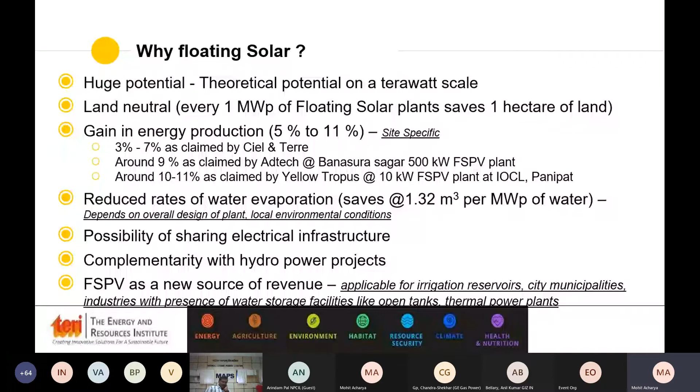Globally, the technology has reached a level of around 2 gigawatts of installation. Out of this 2 gigawatts, majorly almost 94 to 95% has been installed in Asia, led by China, followed by Japan, South Korea, and Taiwan.

The interesting point to note is that earlier, when the technology was getting recognized in countries like Japan and China, the project capacity was in the range of less than 2 megawatts to 5 megawatts. But now larger projects have started coming up, and this reference has been there in India as well.

These are the few companies who provide services like project development, anchoring and mooring supplies, or floating structures for this technology. The major components of this technology, different from ground mounted or typical rooftop PV plants, are the addition of floating structures and anchoring and mooring. Apart from that, the PV modules, inverters, SCADA system, and transformer are all there in the typical solar power plant.

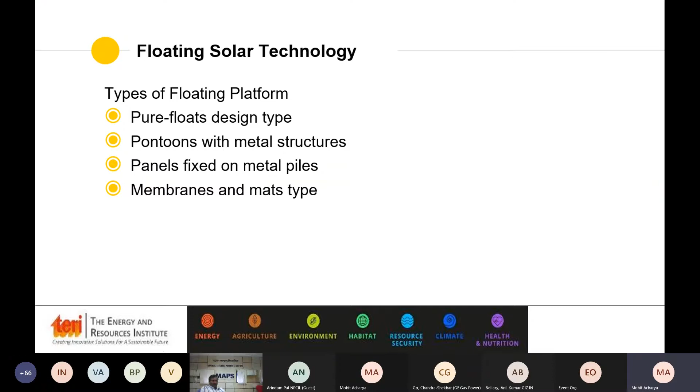To give an idea about the type of floating platforms being used in most projects right now, it can be categorized into four types. The pure float design, which is famously or majorly used in projects right now, utilizes especially designed buoyant bodies which support the PV modules. You can see this type of technology in almost every project coming up right now.

There are different technology providers or suppliers for this: Hydrelio, designed by Ciel & Terre; one more Japanese company who supplies; Sungrow; and one more Indian player, Yellow Tropus, who previously supplied this kind of floaters.

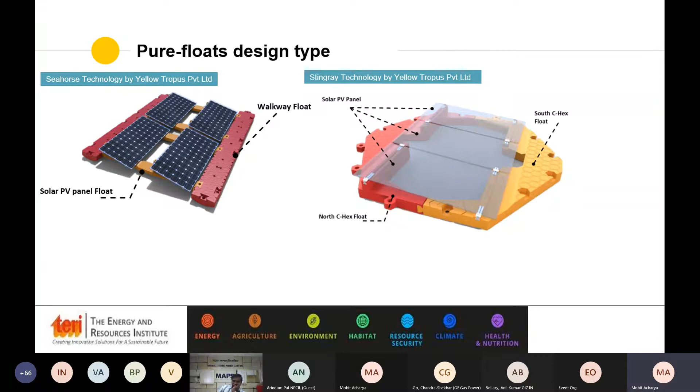Moving into the second type, the floating panels or solar modules are mounted using metal structures and pontoons. This kind of supporting structure came up in the earlier days of this technology and has been used in some projects in Japan as well as Netherlands and so on. The solar modules are mounted with the help of metal structure on pontoons, which provide the buoyancy.

The third type, I could not refer to as floating, because in this case the entire floating solar panel setup, in addition to other components, is fixed to metal piles. This type provides a good opportunity to co-locate floating solar panels generating clean energy while co-locating with fish farms and other uses of that water body. There are a few projects installed in China. The picture you can see is of a 100 megawatt project at a fish farm in China.

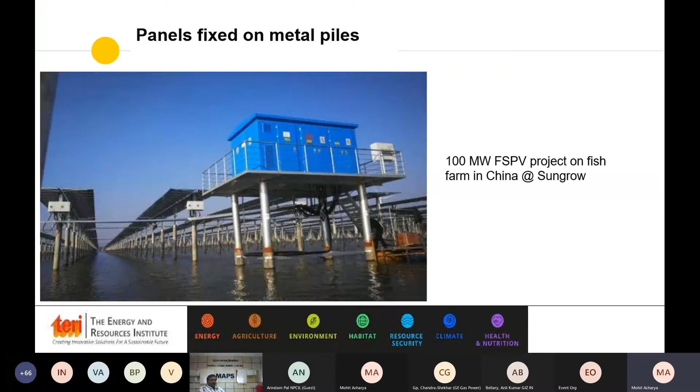The last part is basically membrane type or mat type, in which a platform is created by covering the entire water surface with the help of rubber mats. This type of membrane technology is particularly suitable where the water body has a lesser area, and also in cases like industrial ponds, where you can cover the entire water body area.

Now, since floating solar technology has been installed on the water surface, it is important to understand what role the water body has been playing, and what type of water body or purpose that particular water body serves. It has been divided into further categories.

The first one, which is generally considered low-hanging fruit, is static kind of water body. These are particularly water storage reservoirs used in industrial or process requirements, or in mining ponds or water treatment ponds. Since the surface area of the water body is not very high, there is minimum effect of waves and current, and one can cover almost 80% of the water surface area with floating panels. Also, as the area is less, anchoring and mooring is relatively easy.

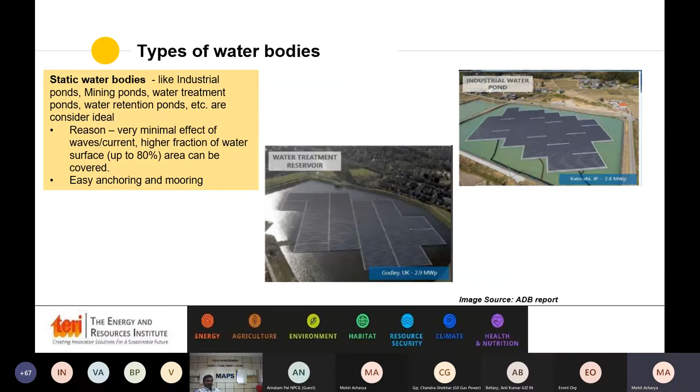The other type is large water bodies, examples being hydroelectric dams or irrigation reservoirs, in which the risk is moderate. This is because the area of the water body is generally high, and because of wind, wave and current effect, there could be a cyclic fatigue load at the floating panels. Also, there are chances of water level and water depth variation. One has to look at the distance from the shore, and do a thorough study of bathymetry and subsoil investigation.

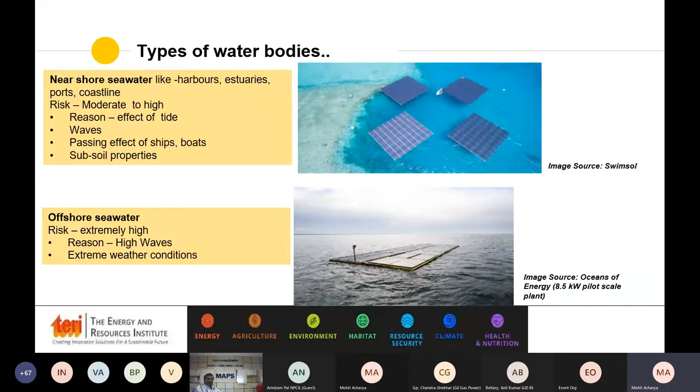The other type is near-shore seawater cases, particularly near harbors or lagoons near coastlines. Here the risk is moderate to high, mainly because of wind and the effect of tides and waves, and if the lagoons are near ship movement, one has to consider the passing effect of ships and boats as well.

The last one is offshore, which looks at installing this type of technology in seawater. Till now, only very few projects have reached the concept-to-commission stage, with around 50 kilowatt to 100 kilowatt installed in a few parts of the globe. Research studies are currently underway on how the longevity of this technology can be increased, particularly in these extreme environments.

You can see a few of the projects installed across various countries, like 150 megawatt in China, which is the largest plant installed in the entire world, at around 150 megawatt.

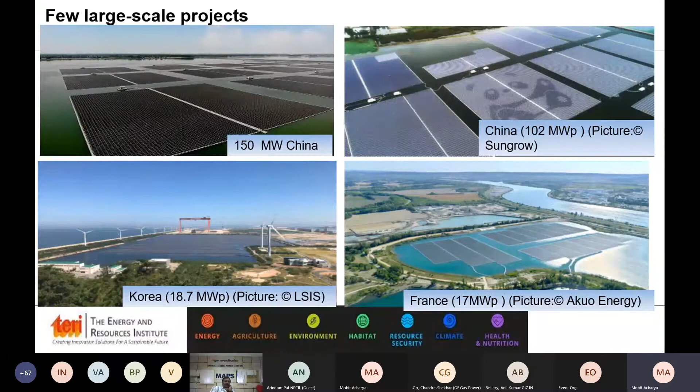Coming back to the cost side, as we have seen in the case of ground-mounted or rooftop systems, the cost of floating solar technology is also being reduced as the technology matures. The interesting point to note here is that India has already been discovering lower rates, lower costs, as compared to other countries.

Recently, in the Andaman and Nicobar, India's first floating solar plus storage project has come up, and the tariff or levelized cost of that particular project was in the range of 7 to 8 rupees, if I remember correctly.

Now, with the support from Energy Transition Commissions India, TERI has undertaken a study in which we have looked at state-wise potential of solar technology.

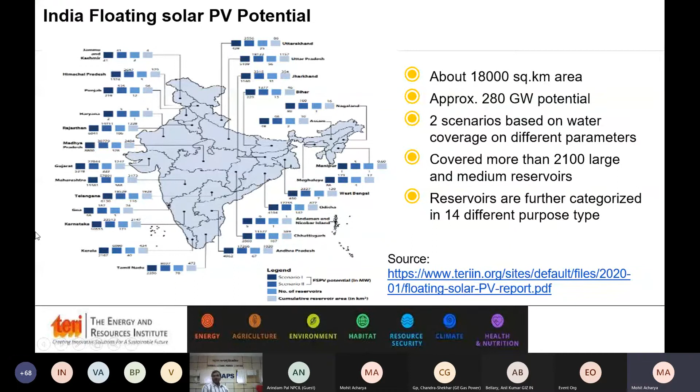The cumulative surface area of reservoirs we identified is around 18,000 square kilometers. You can see the state-wise potential, led by Maharashtra, Karnataka, Madhya Pradesh, Gujarat, and Rajasthan.

Further, each reservoir has been estimated under two different scenarios, and each reservoir has been categorized based on their purpose type.

In this slide, you can see that each of the 2,000 water bodies identified has been categorized based on purpose type, and based on that we've given some threshold or range for how much water surface area can be covered, and based on that we've come up with the potential numbers.

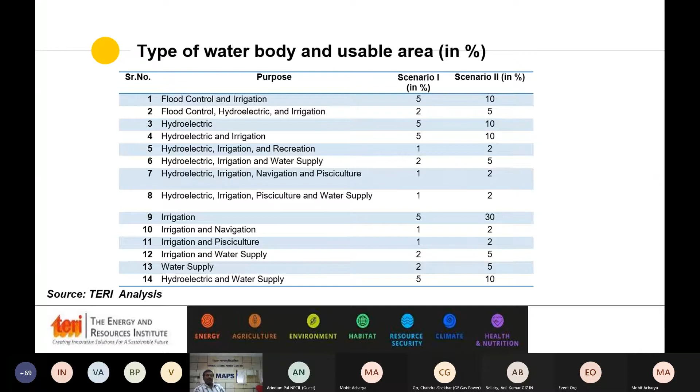The basic approach, I won't go into much detail, because this particular approach has been well explained in the report released earlier this year, and I request all of you to please go through that report to see what approach we used and what actual project design steps one has to take.

Now coming to the project design guidelines, as compared to ground-mounted projects, I would say the feasibility stage or due diligence step is the most important one.

The reason is that there is very limited know-how of this particular technology available, and floating solar projects are more site dependent as compared to ground mounted or rooftop systems. So one needs to do a thorough study of how the water surface area has been changing historically.

One needs to study how the water depth has been changing, how the waves and current profile of a larger reservoir behaves, what the wind conditions are, and what the bottom topography of that patch of reservoir is. So one needs to do a thorough study.

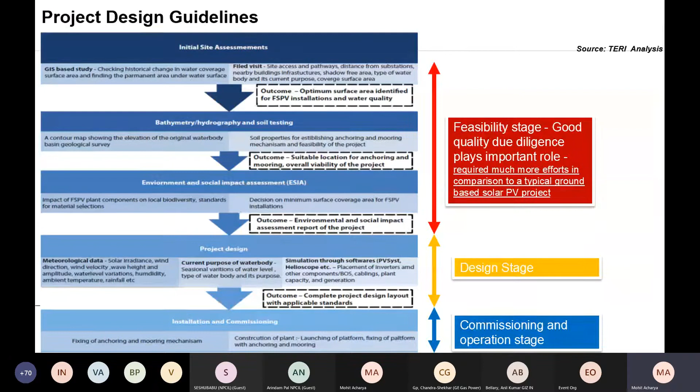Let me give an example of how a GIS-based study works before jumping into deciding that X megawatt of capacity can be installed. I've taken an example of the Parambikulam reservoir.

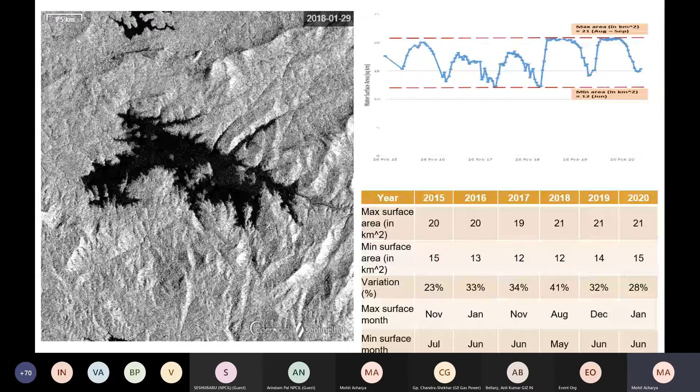So ultimately, from the GIS study, you need to find out an optimal water surface area. If the water reservoir is very large, then that patch should not be too far from the shore, otherwise it will increase the cabling cost and other component costs. It won't be too near to the shoreline either, otherwise there might be chances of drying up in the lean season. So these kinds of steps are much needed to undertake this particular type of technology.

Now, suppose I take an example: you have a reservoir of around 100 square kilometers. Out of that, through GIS based study, you have identified 5 or 10 patches in the reservoir surface where water coverage is almost there entirely in 10 to 15 years, and water depth is also in the range of 10 to 15 meters.

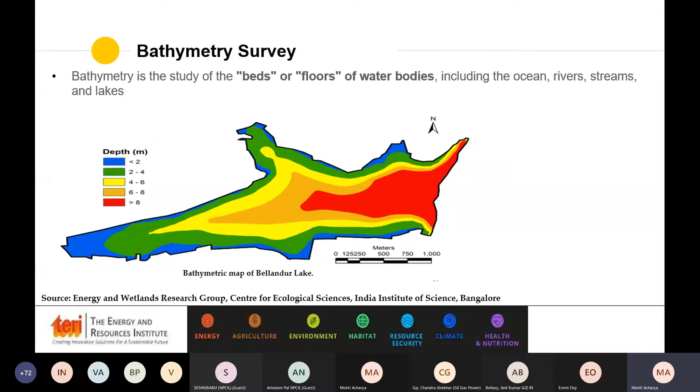Once you have that data with you, you can use bathymetry study to find out the exact topography of the bottom surface beneath the water surface. Bathymetry has been done with two types of technology: one is single beam and the other is multi beam. Each has its own associated costs.

So over here you can also devise a methodology where, out of the 5 or 6 patches you have identified, you can conduct a bathymetry study first with a single beam, because it costs less. Once you have a better understanding of the exact profile of bottom topography there, you can select 2 or 3 patches out of those 5 or 6, maybe around 10 square kilometers out of 100. On that selected area you can conduct a multi-beam echo sounder survey, which can provide much better resolution, and which can be used at a later stage for designing your anchoring and mooring points and so on.

Just to give you an example of how a bad or improper bathymetry survey could leave you - in case the background research has not been done properly, it can puncture the floating panels at the time the reservoir gets drying up. So one has to do a thorough analysis for this kind of technology.

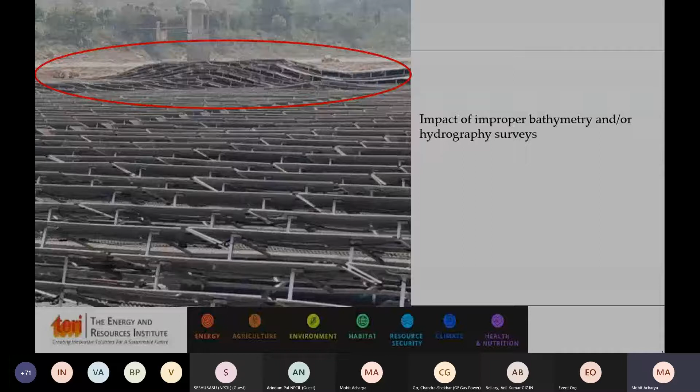The other important part that has been emphasized by Mr. Mishra in his presentation is the plot size. We have to understand that the initial design phases of floating solar PV projects are a bit different compared to a ground mounted one. In a ground mounted project, each row acts as a single unit, so the force because of wind is lower compared to floating panels, because each point or joint is interconnected and acts as a single unit, a single plot. So the plot size plays a very important role here.

A larger plot size can lead to a high number of anchoring and mooring lines, and can cause problems at the time of a cyclone or typhoon event - even if one part gets damaged, it can reduce the entire project lifetime. So as per our analysis, we have found that a project plot size of around 3 to 5 megawatt peak in a single unit is the ideal suitable one, where the forces on the anchoring mooring lines also get minimized.

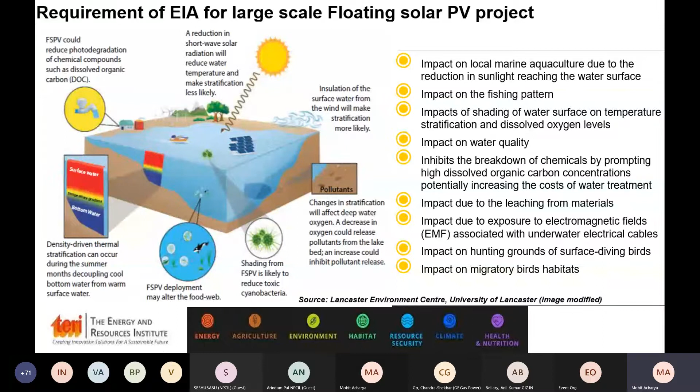Just summing up my presentation, as I explained earlier, each and every activity at the feasibility stage can be a major cost driver or can hamper the overall life cycle of a floating solar project. If one has not done the background research correctly, the entire cost of that particular project can be very high, and we as a technology provider have to consider this fact.

So it requires conducting a thorough bathymetry and bottom topography study. We also have to consider the surface soil conditions, water depth and variation, distance from the shore, water quality particularly salinity levels, and wind speed at that particular site. Each of these points has its own significance and has to be checked thoroughly.

The important point to be considered is that floating PV technology is more location dependent and requires rigorous due diligence compared to ground mounted or other RE technologies. Since it is still early days for this technology, I would request not to compare it with ground mounted costs or other renewable energy technologies, because there is a learning period in understanding this technology. At this point of time, no one knows what its effect could be over 20 or 25 years of its life. So this kind of point has to be considered.

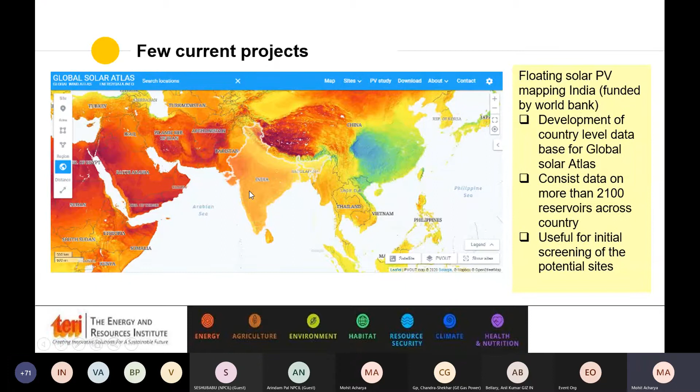So with this, I stop my presentation here. If anyone has any doubts or questions, I'm happy to answer at this point of time, or I can revert back if you have more questions.

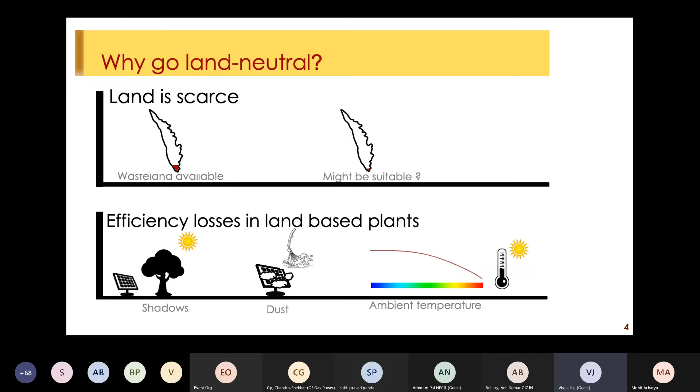More than that, it can be very well integrated into the ecosystem. In fact, if designed well, it does not need to isolate water-based livelihood activities such as fishing, but can be very well integrated along with that. In fact, in the Mekong Valley, there is an experiment going on where floating solar is being combined with fish hatcheries, so you can get the best of both worlds.

I'm sure there are a lot of cases that will come up in India as well, where floating solar should be and can be combined with water-based livelihoods. The other part is that there is a definite concern that Mohit has emphasized, that because of coverage of a water body, there can be problems with the level of sunlight penetration or the level of dissolved oxygen. But these are things that can be designed for.

For example, in order to enhance the dissolved oxygen levels, the floating solar power plants can be combined with large aerators. So with aeration, you can improve the oxygen levels in the water body that can go and feed into the plants and the flora and fauna.

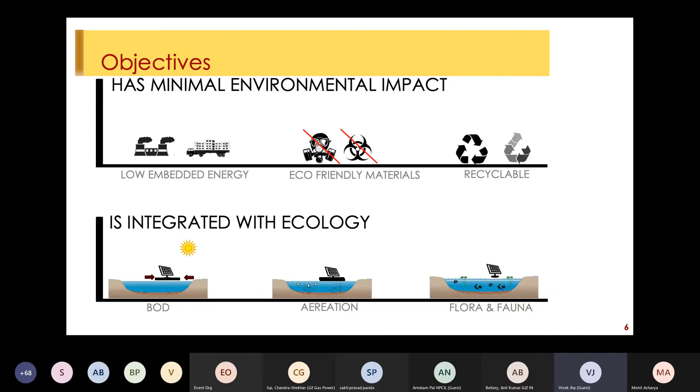Also with respect to sunlight penetration, the tenders as of today in India say that maximum coverage from the structure within the area you cover for a floating solar power plant should be 70%, and 30% of the area should be left free so sunlight can penetrate. And with the use of glass to glass modules and other things, one can look at that as well. It has socio-cultural benefits.

In fact, very recently, we are in talks with inland waterways where floating solar can double up in the form of jetties and provide charging stations for running electric boats. So that, to my mind, is another great business case for floating solar, because as of today, a very limited portion of our freight movement happens through inland waterways. And if we are able to create an infrastructure of charging, then we can create electric-based mobility on inland waterways with the help of floating solar as well.

I'll get into the cost bit in the next few slides. So where all can it be done? It can be done essentially wherever there is a water body. But if we target the most fertile areas first, then large dams, village ponds, lakes in urban local bodies, and reservoirs within industrial complexes.

Within large dams, we have seen NTPC take the leadership, where NTPC has converted a lot of these thermal power plant reservoirs and thermal power plants as sites for floating solar. This is a very stark difference between the presentation I gave last year and this year, because now we are seeing the completion of almost close to 300 to 400 megawatts of plants from NTPC. And that will be a big win for the industry, because there'll be a lot of learnings that will come up along with such large projects.

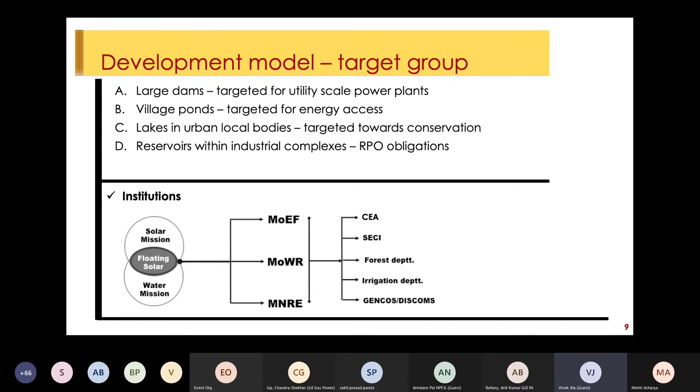And of course, village ponds, we can look at multiple business cases where we can support our agricultural and farmer background with power from floating solar. Under NREGA, about 1 lakh ponds have been created in India. Each of them are about 3 to 5 acres, which can deploy about 500 kilowatt to 1 megawatt of floating solar power plants. This will not only help in a reduction of evaporation losses from the ponds, but would also provide additional energy for a variety of needs that can be considered.

As the report that TERI has done, floating solar as a third pillar, does a very detailed calculation of what is the market available. And also in the last presentation, Mohit stressed the importance of the surface coverage of a reservoir. So depending on how robust the ecology is, the surface coverage changes. If it is a raw water reservoir in an industrial complex, we can go up to about 80% coverage, because it has no ecosystem attached to it. But if we are looking at a lake, then 5%, 6%, or 10% is the maximum one should go.

These are, after we have identified, and most of you are from the tendering authority side, it's important to know where do we choose our sites. These are a few pointers, mostly self-explanatory, but you can see them on the slide.

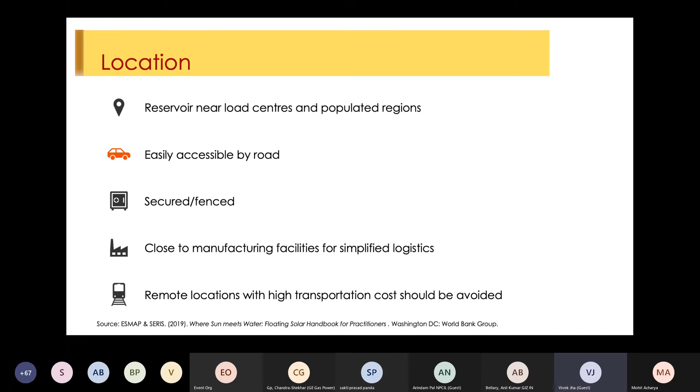It's important to note that security is an important function. Secondly, it should be close to manufacturing facilities, so it should not be a remote location—getting there itself is going to be a huge challenge. And if it is closer to load centers and populations, then the energy can be utilized by those load centers, so one gets a better business case.

In terms of weather and climate, areas should be chosen which have calm water, preferably, with little winds or storms if possible. And if it's a reservoir which gets affected by drought, then this becomes an even more feasible solution.

The shape of the water body, in terms of water body characteristics, should be regular. It should not be an extremely irregular shape. And if possible, the south side of the reservoir should be wider, so that you can maximize the potential of deploying a floating solar power plant.

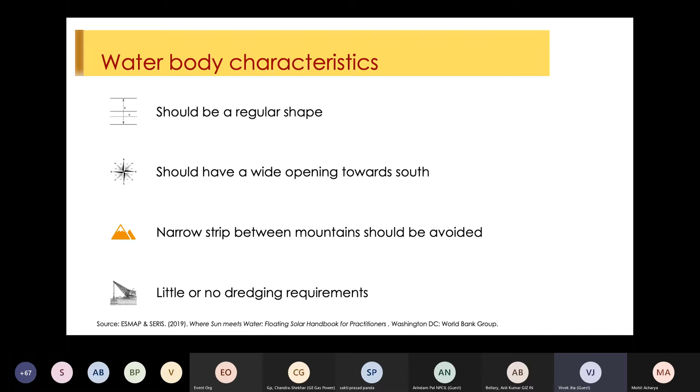One should avoid areas where there is high terrain on either end, because that will give shadow losses. This is the case in our hilly regions where there are reservoirs, but one has to undertake analysis to determine how much shading loss can come because of the high terrain that exists.

If possible, reservoirs should have shallow depth—by shallow depth, I mean 10 or 20 meters at the max. We shouldn't attempt, or we can attempt, reservoirs which are 90 or 100 meters deep, but that will make the anchoring and mooring solutions extremely expensive, and the viability of the project itself might get questioned.

More so, the areas that we choose should have decent soil bearing capacity, so that anchoring and mooring can be planned well. And the reservoir bed, as far as possible, should be clear of obstructions.

For example, the Tehri Dam had submerged the old town of Tehri. Now if we want to do a floating solar power plant at Tehri Dam, first, the depth of Tehri Dam is almost about 100 meters—that has to be taken into account. Secondly, because the town was submerged, there would be a whole lot of obstructions on the reservoir bed, so one will have to keep that in mind.

So low salinity water bodies would be preferred, and it should not be very far away from electric infrastructure, which in case of floating solar is an added advantage as compared to a ground mounted system.

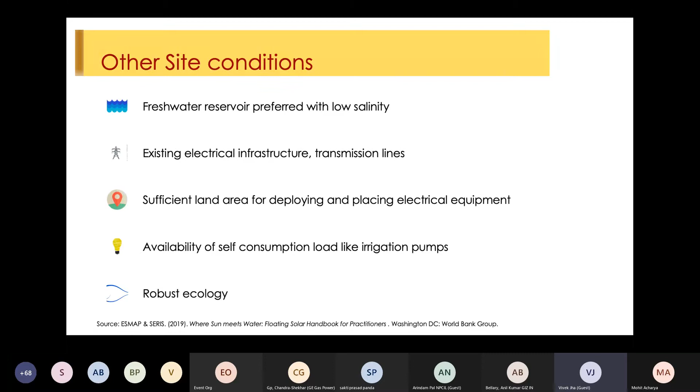Very importantly, there should be sufficient area available close to the shore where all your electrical equipment can be deployed. You'll have the floating solar power plant in the reservoir, but extra electrical equipment such as transformers or inverters would need to come on shore. So sufficient area should be available so that all of these equipments can be placed, and a regular evacuation system can be created.

Now, what is a floating solar power plant? There are multiple dimensions to it, starting with what material we use—should we use thermoplastic, ferrocement, or FRP? So a whole lot of questions and ideas or concepts drive what kind of floating solar plants we need to build for the future.

Later in the day, you'll be visiting a ferrocement plant. It has its own advantages, as it's extremely stable and can withstand heavy storms and floods, but it is also extremely expensive and not scalable. In case of thermoplastic, it has its own drawbacks, where I'm sure other people have spoken about it—the joints crack under multiple cyclic loads, and thereby they are not the best fit.

But whatever be the case, there is a lot of design work that needs to go into the sector. As more and more projects come up and competition intensifies within the sector, there will be more design ideas that come through. As of today, thermoplastic or HDPE is probably the most used material and has a decent amount of buoyancy. There are multiple tests done on the material, which are part of the tender specification, so that makes it to an extent safe, but things like joints and other aspects have to be looked at once again.

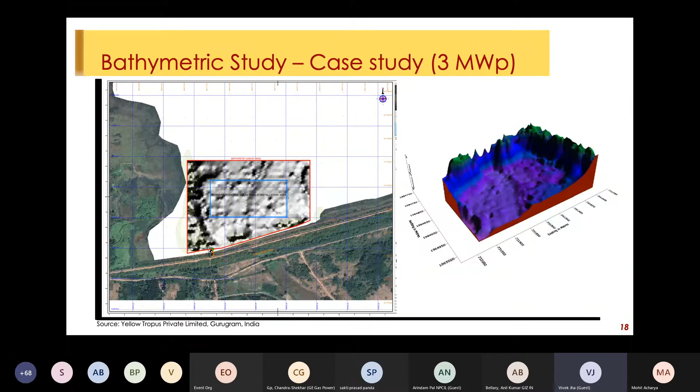So once the bathymetry is done, this is what the bathymetry map in terms of contours looks like, and this is what a bathymetry survey area looks like as a 3D representation on the left and right. Also very much required is something called a standard penetration test, which is done in case of ground mounted plants anyway.

But here, the standard penetration test is done to identify the soil bearing capacity of the reservoir bed. Because if I have to deploy an anchor which has to take a load of about 10 metric tons or 15 metric tons, I better be sure that if I put a helical pile, the soil will not give away, or else all the efforts made into the project will go as a failure. So soil studies and geotechnical studies, including standard penetration tests, become very important.

These are important to choose what kind of anchoring mechanism one deploys in the floating solar power plant. Here you see different types. The first two are what we call precursive earth-driven anchors or helical piles, and the rightmost is a gravity anchor or dead weight anchor.

Depending on the loading on a power plant, one can decide whether to use a gravity-based system or a pile. Let's say if my loading comes to about 10 metric tons, and if I decide to go with gravity anchors, the density of concrete used is about 2,500 kg per meter cube. As soon as it goes in water, the apparent weight of that anchor becomes half. So if it's a 2-ton anchor in water, it'll have a holding capacity of only 1 ton, because a lot of it will be lost to buoyancy.

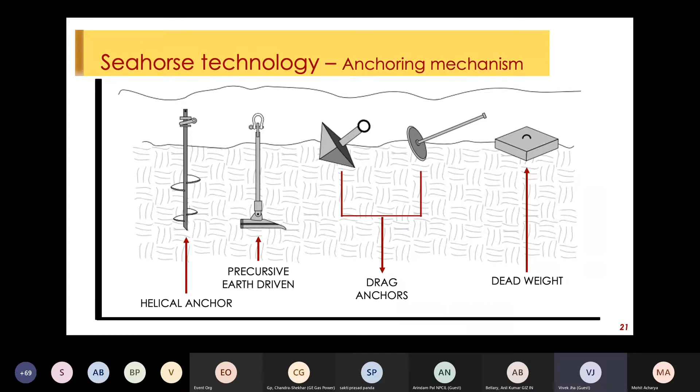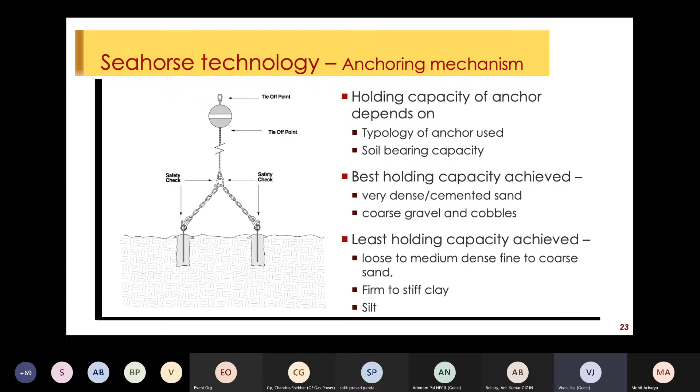So depending on the soil capacity, you decide which type of anchor you use and what will be the design of the anchor. It is not one size fits all. Every site has different requirements, and that will have to be calculated through geotechnical evaluations.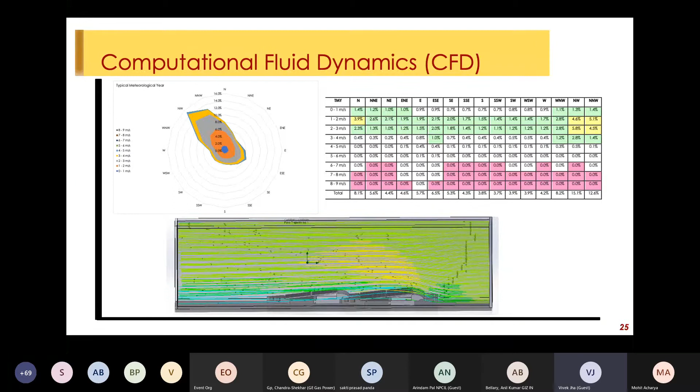What other studies are essential need to be conducted from a design perspective, and this is typically what the developer or the EPC would do. You'll have to consider computational fluid dynamics to see what wind loads are coming onto the floating solar power plant, from which direction, and how much.

Then finally, you come up to the final design of the anchoring and mooring. Also, while designing the anchoring and mooring system, you have to take into account two things. One is the water level variation, because in most of our reservoirs, during shallow periods the water levels will be low, and during the monsoon season the water level will be high. So you have to account for this variation. Also, one has to keep in mind that your solar plant always needs to be south facing.

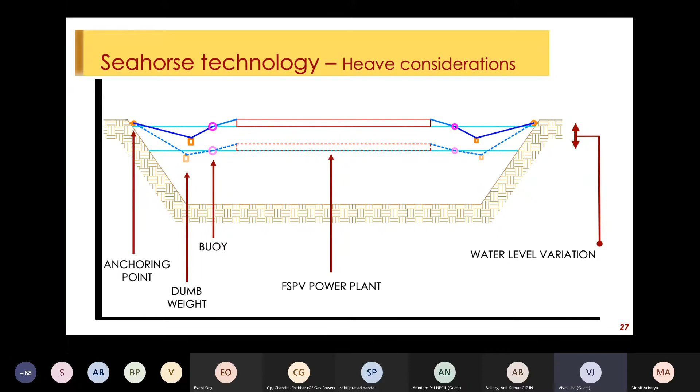As I said in an earlier slide, once these studies are done, you also have to parallelly locate an area where assembly and storage of your floating power plant can happen. A floating solar power plant essentially gets constructed on the ground, then pushed into the water. So for on-ground assembly, you need an area—approximately 2.5 to 3 square meters per kilowatt peak is required per megawatt of inventory you want to keep. Also a clear area of almost 200 meters by 20 meters is required for the assembly.

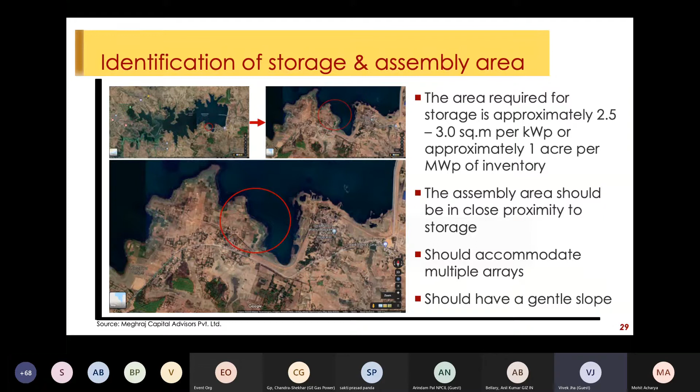Now we come to the risks. Anilji, how much time do I have? Okay, never mind, according to my watch I have another about 5 minutes, so I'll try and hurry this up.

Moving forward, there are multiple risks that are appreciable in a floating solar power plant. One is value chain risk, because as Mohit and other speakers said, this is not an established industry. From design of floats to actual deployment, there are multiple gaps in the value chain that exist today, so one has to take that into account while planning a project. Please don't give very short timelines, and take contingencies into account, because as the industry is not very established, some processes may create a bottleneck and take extra time.

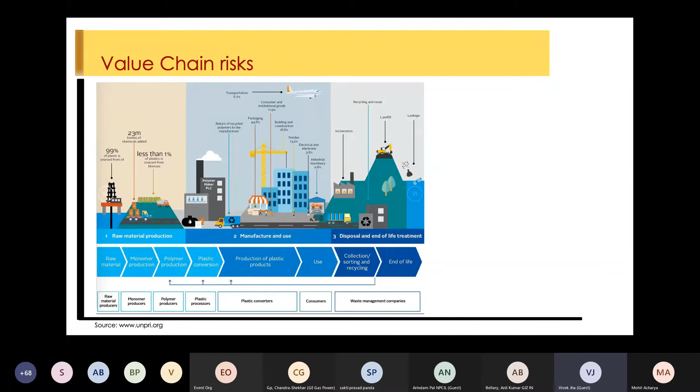Also there is a problem with multiple contractors available. As somebody asked, for hydrography you have a different contractor, for bathymetric survey you would have a different contractor, then for deployment on land you'd have a different contractor, and for deployment in sea or in water you'll have a different contractor. So there are multiple contractors that exist today, and there is not one agency or contractor that will give you a turnkey solution. So it's important to make sure the process you follow while designing and executing the project is flawless, where multiple contractors can come and talk with each other and help in the design procedure.

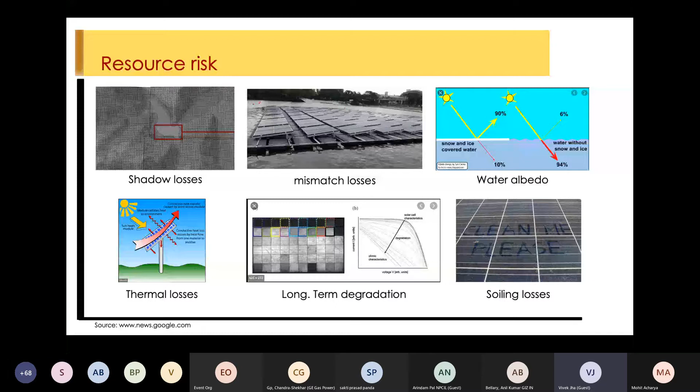There are policy risks, as many of us are aware - Andhra Pradesh was one example last year. There are resource risks, which are pretty self-explanatory. The first one shows what I was talking about, high terrain, and then there are mismatch losses because of waves and other factors. There can be other factors to consider, like soiling losses or long-term degradation, some of which are general to ground-mounted solar as well as floating solar.

There are regulatory or compliance risks. I remember the government, a couple of years back, Maharashtra was planning a large floating solar power plant, but the moment this power plant was announced, there was a lot of protest from the farmers. So an environmental and social impact assessment, though it might not be necessary as a regulatory procedure, it's extremely important that you undertake it as a tendering authority, developer or EPC, because you don't want to be 3 or 4 months into the project and suddenly a risk shows itself, or people start protesting. All the communities and associated stakeholders need to be taken along while designing the project, otherwise one will have problems deploying and maintaining the project.

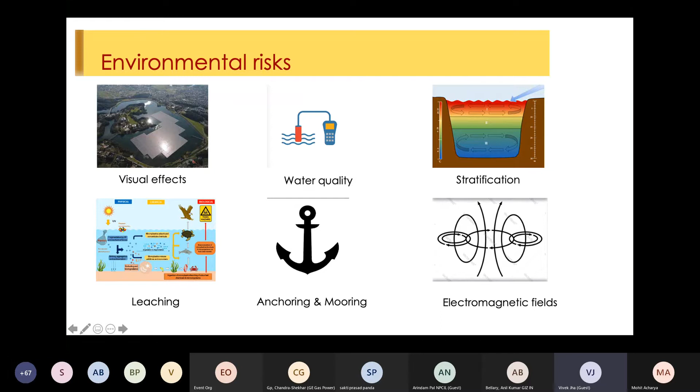There are definite environmental risks, most of which have been explained earlier. Another thing we don't often look at, shown on the top left, is the visual effect of a floating solar power plant. If you're locating it close to an airport, it should not be very large, because you'll get a glare from the floating solar power plant which might affect incoming flights. Also, there are risks because of electromagnetic fields associated with floating solar power plants, which need to be taken into account.

In summary, what I've tried to do is give you a whole lot of risks which are associated. There are a few risks I haven't talked about due to paucity of time, but there are technology risks which some of you asked about - what kind of float should we take, what kind of anchoring mechanism should we deploy?

Construction risks - who is the contractor doing the project? Are they an established contractor with the right track record? What are the operation and maintenance risks? How often do I need to look at the anchoring and mooring system, once in 5 years or once every year? And what if there is a sudden storm - how will I maintain the plant?

Finally, something not talked about in policy circles is the decommissioning risk. We are putting up a lot of plastic in the water body, which is HDPE. What happens 25 years down the line? Who is going to recycle the entire plant? Is the plastic used in the floating solar power plant being recycled by the developer, the component manufacturer, or the tendering authority? So these are some questions and risks associated which one has to see.

Finally, I'll leave you with a bit of good news. We did a plant at IOCL, which was in an industrial water body, and we compared the electricity generation to a rooftop plant in the vicinity of about 100 meters. Within a period of about 4 months, we saw a gain of 8.3%. This means that if you design your project well and the site conditions are right, you can get a definite gain from floating solar - meaning the cost of floating solar can be 8.3% higher than the cost of your rooftop system and still be viable.

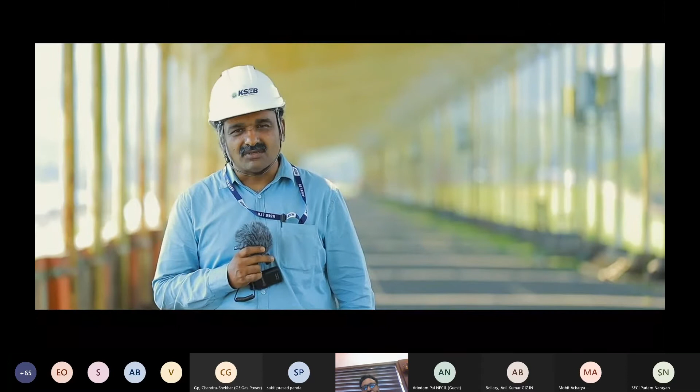Good afternoon. On behalf of Kerala State Electricity Board, I welcome you all to the virtual tour of Banasura Sagar floating power plant. Before I move to the plant, I request my colleague, Mr. Anil, who is looking after this dam, to give an introduction about this dam, and after that we will move to the actual location where we are all eagerly waiting.

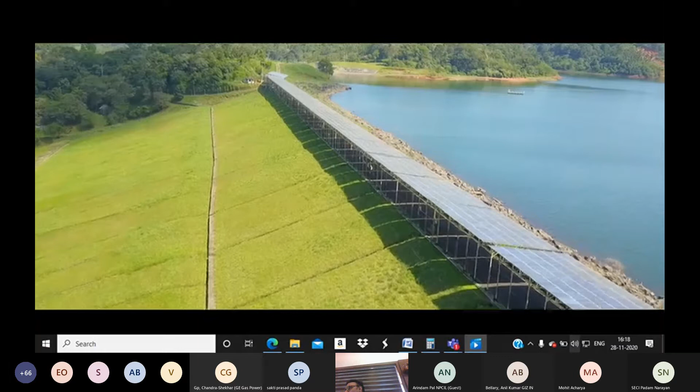Welcome to all. The floating solar power plant, 500 kW, was the largest one in India when commissioned in 2017. This plant is located in the Kutyadi Augmentation Reservoir, commonly known as Banasura Sagar Dam. Before moving to the plant, we'll discuss the common technical features of this dam and augmentation scheme. It is situated in Karamanathodu, the largest tributary of the Kabani River, which flows through Kerala, Karnataka and Tamil Nadu, then finally ends in the Bay of Bengal. This is the second largest monolithic earthen dam in Asia.

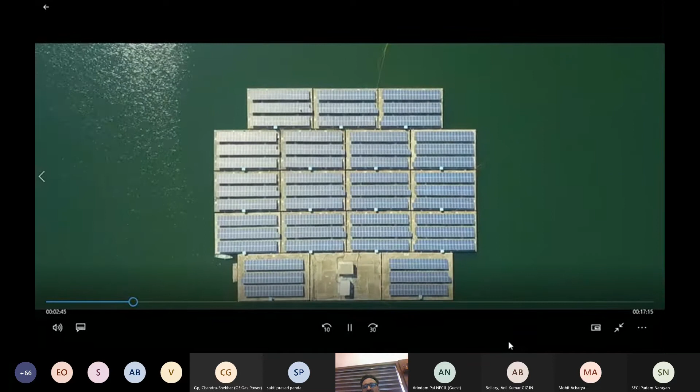Welcome you all to the 500 kilowatt Banasura Sagar floating power plant. I'll quickly move to the complete plant, where we are standing in front of the panels. Just to give you an idea, we have totally 17 floats, made up of ferrocement, on which our plants are located.

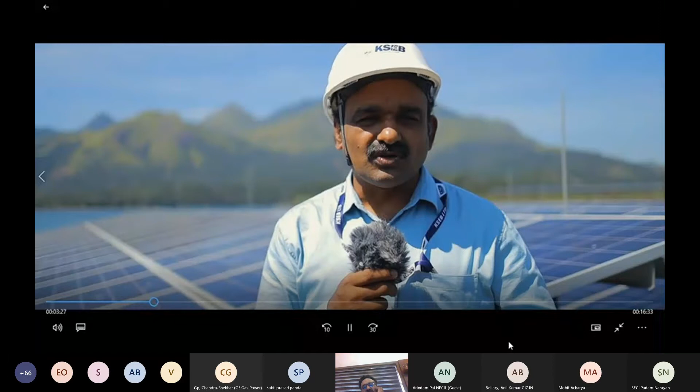Every plant has approximately 23 modules in series, forming one string, and we have 5 such strings connected to a string inverter. After that, from the string inverter it goes to the AC panel. From the AC panel we have another transformer, stepping up to the 11 kV level, and from the 11 kV level it goes to our grid. This is the basic idea of our plant.

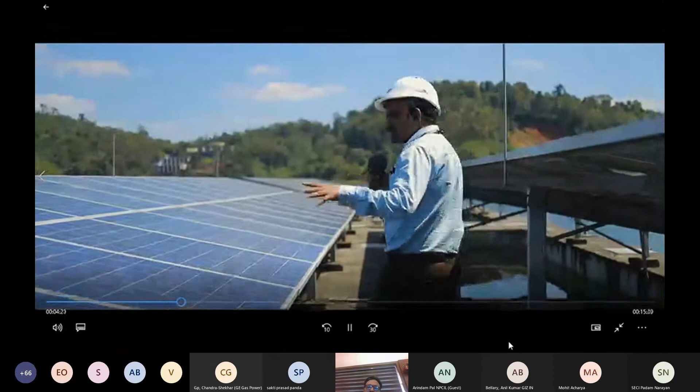We are now moving onto this floating panel. You can see this is actually our ferrocement float, and it is very stable compared to other HDPE floats. That is what we found. Just like we are moving on normal land, that is the advantage of this ferrocement, where we have no vibration at all. For the solar plant, if it is vibration-free, then we get the complete output. That is the advantage of this plant.

Also, what I wanted to show is this water. This plant is placed over the water body, so the cooling effect is direct and the plant gets cooled. This is one of the advantages of placing our panels as floating solar. This is the design we have: you can see this water, and above which our panels are placed, so that the temperature of the panels comes down.

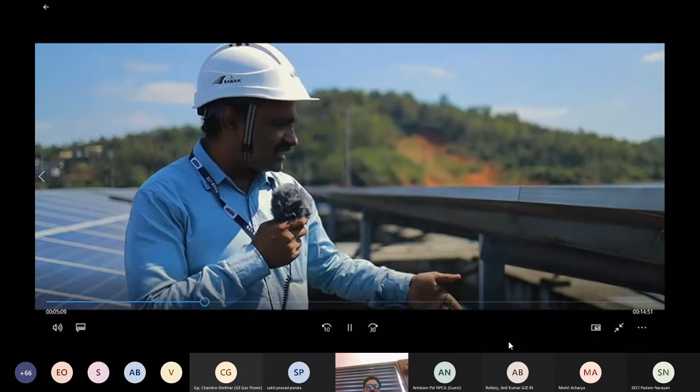So basically, we know that the output voltage, or output power, is inversely proportional to the temperature of the modules. Temperature is less when it is placed over the water. This is the design here. Let's move quickly to the next.

Inverters. I already told these are the modules, and we have 23 modules connected in series, and like that we have 5 strings. One string has got 23 modules, and then we have 5 similar strings, all connected to one string inverter of capacity 30 kilowatt.

Let's move to one inverter and we'll see the inverter. Then we'll move on to the control panel.

Yes, this is our earthing strip, and this earthing strip is actually in every float. It is surrounded in the water, and this earth we are taking directly and connecting to remote. We are not putting this down and earthing it here. We are taking this earth completely, and then earthing it at the remote shore. This is how earthing is done. I'll explain it when we reach the plant.

You can see the gap between these two floats.

As you all know, the solar plant is to be placed facing south, and this angle is approximately 15 degrees here. As per our design, it is approximately 15 degrees. This also you can see here. I think the structure also, you can see this structure. This is the structure part on which the panels are placed. And this is, as I have already told, over the water body, so that the panel is cooling down because of this water.

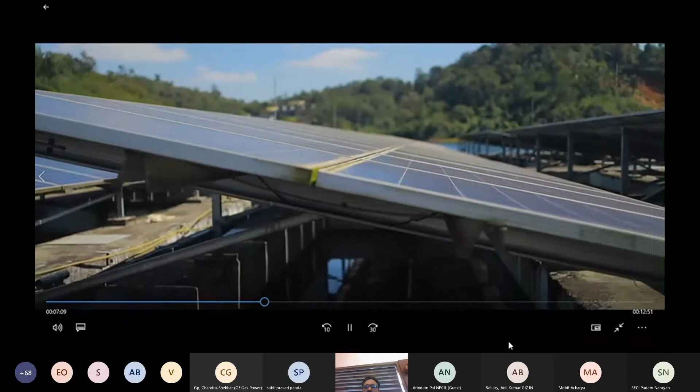One more thing I wanted to say. If we can place water - that is what literature says - if you can sprinkle water in one way or the other, then the temperature of this panel will go down, which will in fact improve the efficiency of the plant. This is what we are also planning on an experimental basis. We have to put some water continuously, or sprinkling, or whatever way we try, and we are planning to do that to increase the efficiency of the plant. The water will be coming throughout, so that temperature will come down. When temperature is less, then you can see that our efficiency will be going up.

This is our main central float. I have already told that we have 17 floats, and apart from the 17 separate floats, we have a single central float on which our control panel and SCADA system, as well as transformer, everything is placed. The peculiarity of this plant is that the DC to AC conversion is done in this plant itself, so that we are evacuating AC from here, not DC.

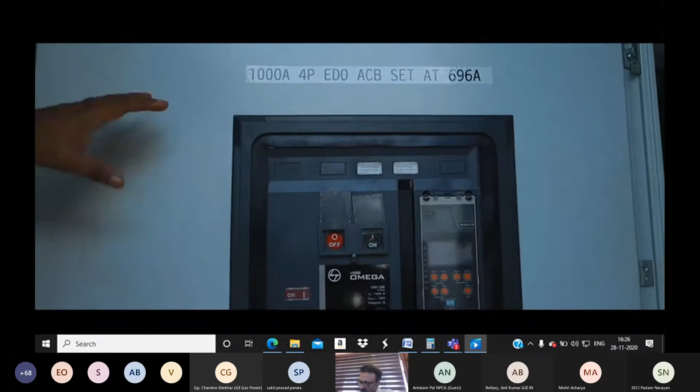These are the ones, and from here it comes to your circuit breaker, the LV circuit breaker. We have relays connected for the AC side, including overcurrent relays and earth fault relays. We also have voltmeters and ammeters which show the actual power.

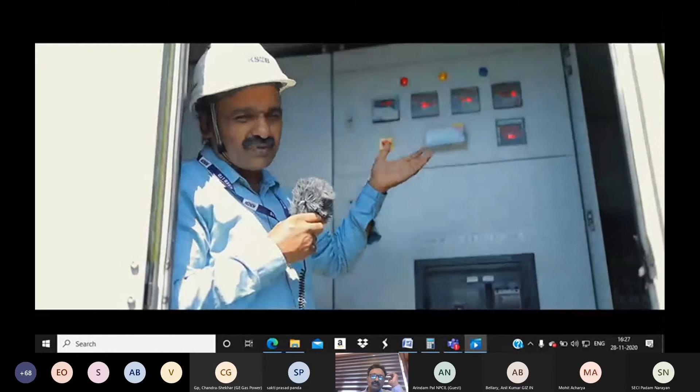Apart from this, we have SCADA which gives you accurate power details. Let us move to the HV side. As I mentioned, the peculiarity of this plant is that the conversion from DC to AC is done here itself, and from here the voltage is also stepped up to 11 kV.

That is, 415 volts is stepped up to 11 kV here. Let's go to the transformer where it is being stepped up. This is our transformer, a 415 to 11 kV transformer. We are connecting the LV side star and earth, and the HV side is delta connected. This is the way it's been connected, and you can see the earthing here.

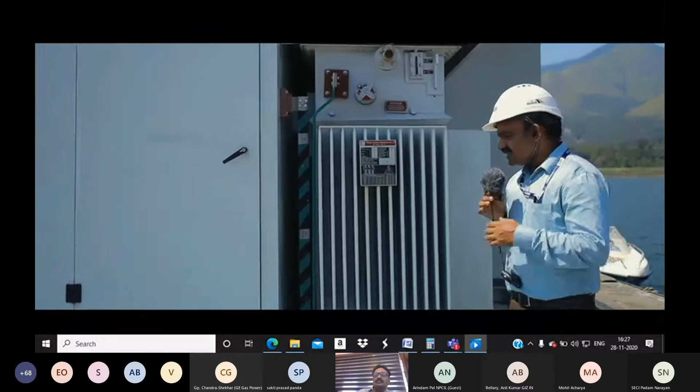This is the earth point, and this earth is actually directly taken to the shore through a separate earthing cable. We have used an earthing cable itself. The reason for taking this to the shore is that we do not want any earth fault current to flow through any fault site.

We don't want any potential to rise here or anything during a fault. So we have designed it in such a way that all the fault current will be directly going to the shore, as if we have brought that earth here directly, so that we will not have any health hazards or voltage issues when we have faults in the 11 kV system.

Another thing is the main evacuation cable that you can see here. This is our evacuation cable. It's coming out from the transformer. It is an 11 kV evacuation cable, specially made for this usage in this water.

Through this cable, it is going through the water. From this water, it goes to the structure there, the 11 kV structure, through which it is being evacuated. You can also see here.

This is our cable management system. We call it that because when water is here, during summer season water will go down, and during the rainy or monsoon season water will rise up, so that variation is taken care of using this system. There is actually a pulley system here that is used for that.

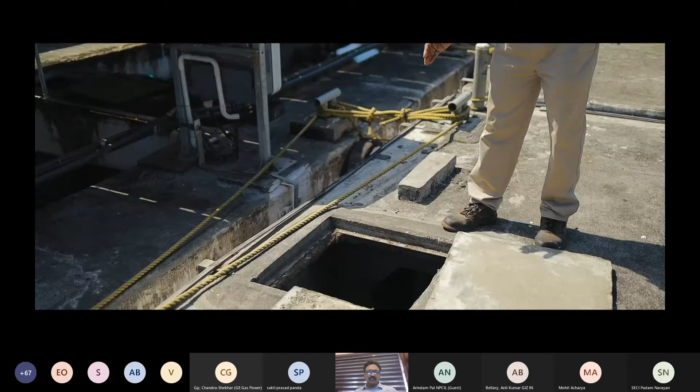This is a floating platform, and inside it is hollow - I will show you that. Inside, only a 2 centimeter (20mm) wall is there - bottom, 4 side walls, then a top cover, which is also a small concrete wall. This concrete is made up of ferrocement concrete, reinforced with 3 types of reinforcement: one wire mesh, second chicken mesh, and inside 6mm rods as temperature reinforcement - that is the peculiarity. Every piece is separately constructed, then jointed - the sides and top are jointed afterwards. That is the method of construction.

Before concluding, for the safety of this plant, it is designed based on wind velocity. One additional security feature for this mother platform and the other platforms is, to detect any possible water ingress, we have marked 3 lines inside and outside the platform. We continuously monitor the water level of the float, and bail out water with a pump if needed. That is the additional feature we have provided here.

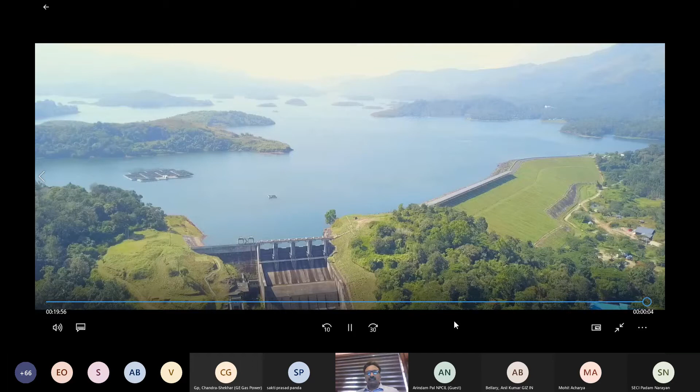I think we have completed our virtual tour to the Banasura Sagar. Hope you have enjoyed the place. It's one of the beautiful places in Kerala, also a tourist destination. People can come and stay for one day and enjoy boating - all facilities are here. I will continue with my presentation.

Ayub sir, can I just intervene for a minute or two? Yes, please. Thank you very much, Ayub sir, for a very professionally done video. It's amazing the way both you and Anil sir have put the voice, and the shooting has been extremely professionally done - really beautiful. I was reminded of our visit back in March 2018... sorry, 2019. It's really nice. Thank you very much. Please go ahead with your presentation. Thank you, Anil sir. It gives us more pleasure as well as encouragement to do more.

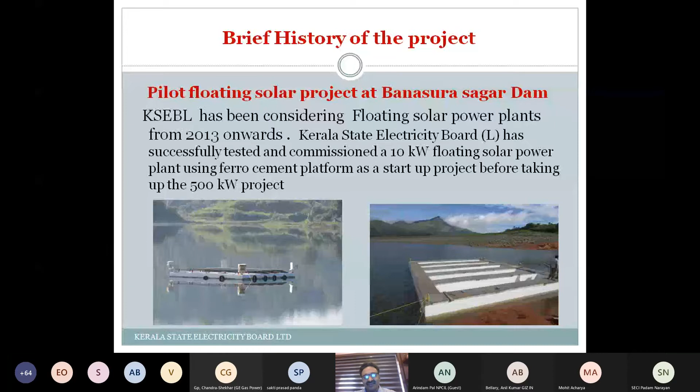One point to be noted is we started thinking about floating solar power plants in the year 2013, when some students from an engineering college near Wayanad came up with a floating solution using ferrocement floats, which we later took up. That was near our plant - a 10 kW plant, and it was successful. Then we went to the 500 kilowatt project using ferrocement. Worth mentioning, we had the worst ever floods in consecutive years. We should have taken photographs or video to show the world that the plant had actually successfully stood through this flood situation.

I don't want to go into methodology and all that, it's been discussed a lot. Now, why floating solar? Everybody has discussed this, and it's almost the same point, but still a little different thought.

Fossil fuel-based plants require less space, and the energy produced is continuously available. In order to replace fossil fuel-based plants, nuclear plants, gas, diesel, or coal plants with renewable energy sources like solar or wind power, we need to address two distinct problems. The first is the large land area required for solar power plants compared to conventional plants. The next problem is the storage issue of solar power plants as compared to conventional plants.

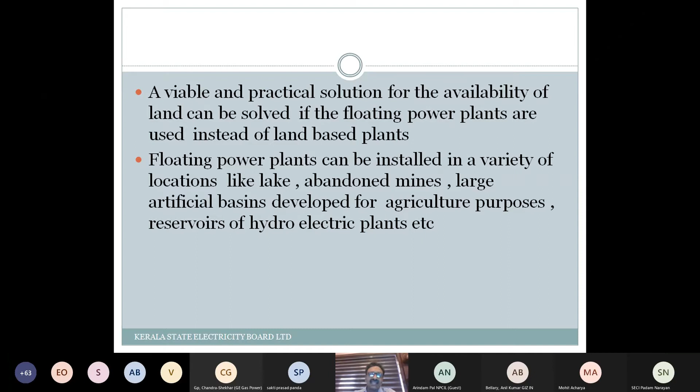A viable and practical solution for the availability of land can be solved if floating power plants are used instead of land-based plants. That's the advantage, as mentioned by other speakers. Floating power plants can be installed in a variety of locations like lakes, abandoned mines, large artificial basins, and so on. Seawater is another possibility, but its use is challenging due to heavy tides, salt corrosion, and power evacuation issues compared to other locations.

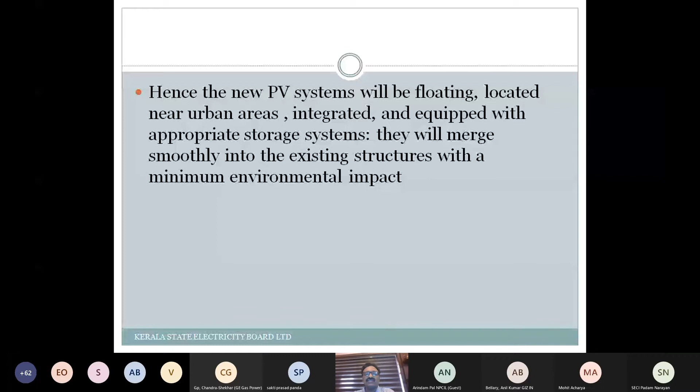The issue of storage is common to all renewable energy, but floating solar plants combined with a pumped storage plant are an ideal solution for storage of electricity. This is the core of this presentation: water pumped during day hours using the floating plant's energy can be used in the pumped storage plant during night hours. Hence, new PV systems integrated and equipped with appropriate storage systems will merge smoothly into existing structures with minimum environmental impact.

Now the floating power plant requirements, I'll go quickly. It should have modularity - a modular structure built either at the location or at a remote place. In our project, we built it at the same place where we had the shore, then transported it through water to the exact location. The flotation sector should be modified to implement cooling systems, tracking apparatus, and robustness. The floating system shall be designed to withstand wind speed, wave tides, water currents, ensure personnel safety, have optimal raft size for easy transportation, and minimal cost - which is the final but most important part.

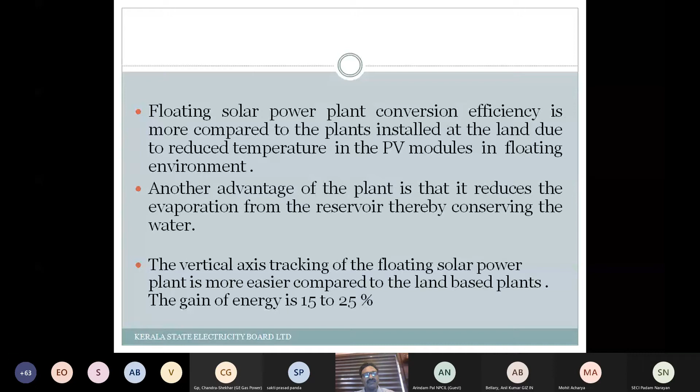I don't want to go into detail on the salient features since other speakers have covered that. But one point that may not have been discussed so far is that tracking is easier with floating solar power plants compared to land-based plants, and the energy gain is approximately 15 to 20%, even 25%. All other points have already been discussed by the other speakers.

Another point is reflector and gray energy. With the reduced cost of the tracking system in floating power plants, using a concentrator for reflected energy is more economical, which in turn increases the efficiency of the plant. The concentrator can direct and concentrate light waves toward the solar plant, which is more economical according to the literature.

Now we go to the major components of the Banasura Sagar floating power plant. The float is made up of ferrocement, and there's a mooring and anchoring system - I'll discuss how that's done. Then there are modules, string inverters, and panels, which I won't go into detail on. Earthing, lightning protection, weather monitoring, and other things are also included. The important part is that the platform is made of ferrocement float, and the mooring and anchoring system keeps the ferrocement float in place.

Another important point is the grid integration of the generated energy - grid integration and how we've handled it. And of course, as everybody has mentioned, there's no standard procedure so far for the best possible floating power plant design - whether to go with land-based transformers and such, or place them on the float itself.

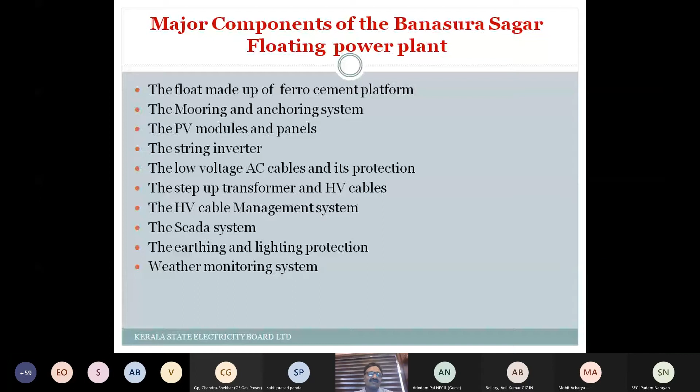This was when we did this, it is not done without much planning. This was a research and innovation project, so we went ahead with it, and as and when problems came, we tried to solve the issues. I'll come to some of the problems we faced during plant commissioning.

As I already told, there are 17 platforms made of ferrocement used for placing the solar panels and inverters, with a center platform for the substation, control room and SCADA system. The float is held in place by a Seaflex mooring and anchoring system. The total area of the float is 1.23 acres, and compared to the land-based one, this 500 kilowatt plant takes only 1.23 acres.

Also, the modules we used at that time were only 260 watts per module, but now modules have come with up to 500 watts per module. That means the area can be even reduced to half. People in the design side should be thinking about this - the float size is going to be comparatively less, even half of what we have made, which was 1.3 acres. Compared to the land-based one, for a 500 kilowatt plant, it takes approximately 2 to 2.5 acres. That is the experience.

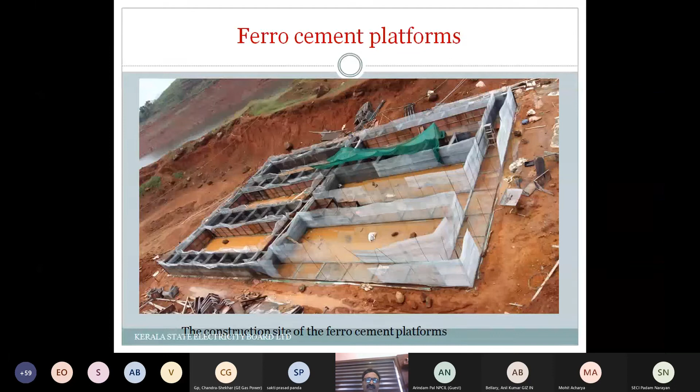This is the plan we have seen, let me show you some pictures. This is the ferrocement float platform being made near the shore, and the photograph shows the construction stage. Now I'll come to the mooring and anchoring system - this is the basic mooring and anchoring system.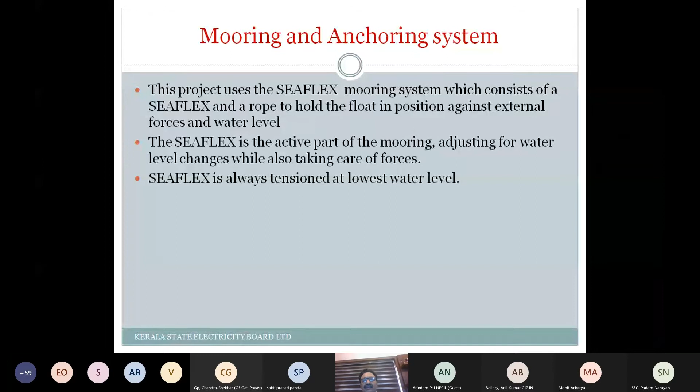The system is used to keep the float in position against external forces and water level variations. This project uses, as Mr. Franco has already mentioned, Seaflex, which is a Swedish company. That company did the design for the Seaflex, which is used for mooring, adjusting for water level changes while also taking care of forces.

You can see the photograph of this, let me take my pointer. This is the concrete block, actually placed at the bottom of the water, approximately 6 tons of weight. It is made at the shore and then transported. Transportation was very exciting, though unfortunately we don't have a video of that. It was brought to the place where it should be.

It was transported over a balloon in the water from the shore to the place, and when it reached the exact spot, they just broke the balloon, and it sank and stayed in the place where it should be.

This is the way, and you can see the Seaflex here. This is the Seaflex, and what it does is provide adjustment, because the water level is going up and down, so this gives you that adjustment. This is a rope like this, you can see there, here it is written ropes, and this is the platform. This is the idea of mooring and anchoring.

The technical details: maximum wind speed is 32 meters per second at 10 meter height for the wind speed. That is normally what literature says, that the height of the wind to be considered while designing this. 32 meters per second is about 115 kilometers per hour, and that is the maximum wind speed that is considered.

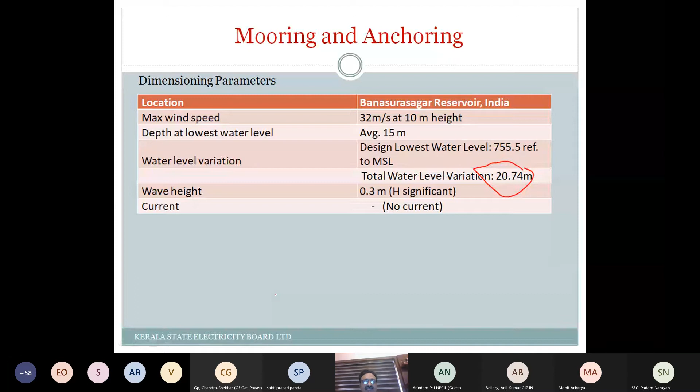Depth at lowest water level is 15 meters, and the water level variation, you can see here, is approximately 20 meters. Wave height is 0.3 meters, and water current is not being considered here because it is a reservoir where there is not much water flow.

Methodology for calculating the forces acting on the flexible C-flex mooring system. The method is based on British standard. Force due to wind is the first force considered, and wind forces are considered 10 meters above the ground.

Then forces due to waves. Then forces due to current, which is not considered in this project. This is normally what they consider, but the current is not being considered here because the current is here very, very less.

As Cha has pointed out, there are a lot of software application programs used for finding out the design, which type of Seaflex they wanted to use. So the system is based on British standard, and below is a short summary.

Dimension parameters, the structures of the floating systems are first set. How to do it: determine the total exposed area, the wind pressure is calculated, and the wind pressure together with the total exposed area gives the wind force acting on the structure. The total horizontal force acting on the structure is calculated as the sum of wind forces.

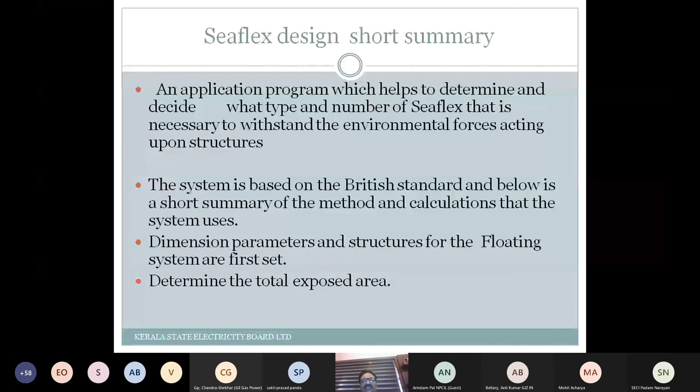This is important: wind forces and other added extra forces, wave and current force - this is the idea. The force in the mooring system is calculated from the total force, and the type and amount of Seaflex is determined. That is how they do the design calculation. It's a brief idea of how they do it.

And this is the actual final layout of our system. You can see our float here, this is our float, and this is the first one, A1, and you have A2 here, you can see A2 here. This is all the position of the anchoring, that concrete block where it has been placed.

This is based on what they did, and they found the area, and they found out what type of Seaflex is to be used in the area, to give you an exposure of what is to be done, or what is being done, when the float is to be placed somewhere. This is the idea of this.

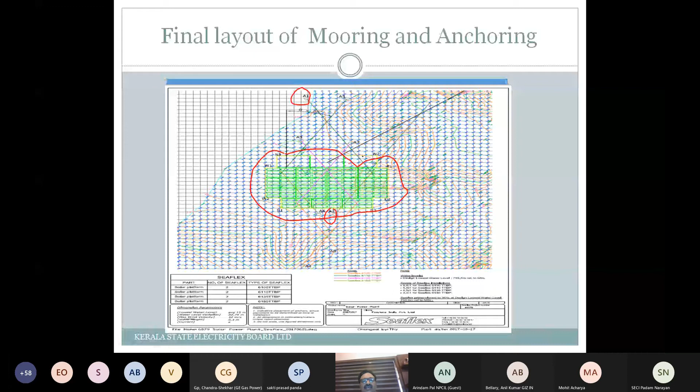Then placement of PV panels. This comes to the plant again, which we have already explained. This is placed over the water, and that we have discussed.

And this is about the electrical diagram. Electrical diagram is this, you can see there is no much difference actually. These are our panels, like that you have - this is one float, and you have 17 floats like that, one having an approximate capacity of 30 kVA, and then maybe the string inverters are there. Then it is going to a bus, then LVCB or current relay, then a transformer, and to the grid.

This is the specification of the PV module, I don't want to go into details. Configuration of PV modules - this is also not of much importance now because there is no much difference.

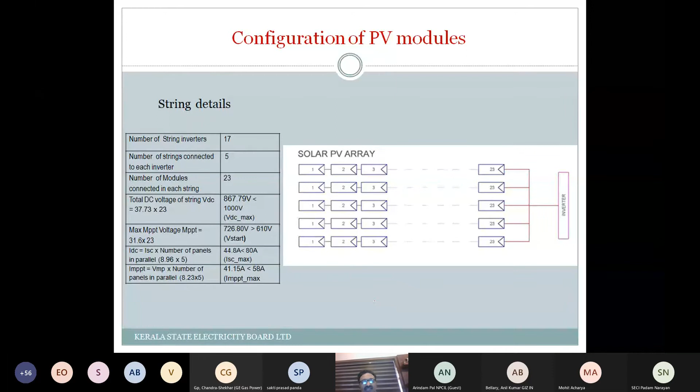11 kV substation and grid integration, grid connectivity. This is a different thing, and it is not normally seen in the plant in the float, because we had sufficient capacity in the float, we have gone for that. This is the advantage, because the voltage itself is converted into high voltage like 11 kV, so that the losses are minimized in this case. That is the advantage of this.

Of course, you will have one way advantage, or the other way it may go in the other way - it is different, but here we had that advantage. The 11 kV substation with 415/11 kV 500 kVA star delta power transformer is placed on the central platform.

Grid synchronization done in the float. Power from the float is evacuated to the shore through 11 kV XLPE power cable specially designed for the application, because of its special water-resistant design. That's what the cable manufacturer says—it is water resistant, but it's not marine cable. Basically, marine cable is not being used. Net metering is there itself.

The cable management system we have already discussed, I don't want to go in detail. String inverter, that is also technical detail which I don't want to go into.

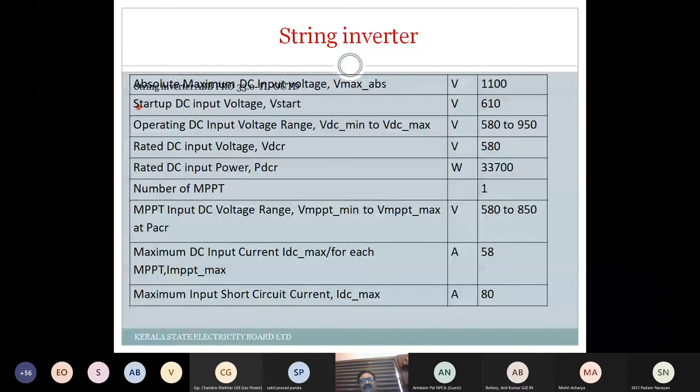Earthing challenges—this is another important point which we wanted to discuss. When we placed the transformer in the float, we had a big challenge. When there is an 11 kV fault, the fault current is going to... The initial design given by the consultant was marine earthing.

The current would pass through the water and back to the shore. But as you know, even LV voltage poses dangers to human life. We thought it is not okay to go ahead with such an earthing system. So we thought about what was to be done.

We know that when there is a fault, it's just like an earth on this platform. So current is going to flow, the potential is going to rise, step potential is going to come, touch potential is going to come, so that people standing on top of the float platform are going to be in danger. We wanted to avoid all that.

So finally we came to a conclusion: we take the insulated cables that we showed in the presentation and the virtual tour, and connect this directly to the shore. That way there is no point of current rising—I mean, voltage rising in the float.

We did some calculations to find out what the voltage rise would be, and whether it meets the requirement to avoid dangers from step potential. All this was calculated. And as everybody has told, we were searching for standards on what to do with such a thing, because as a utility we are not a research team—we have to have something in front of us to follow. That was the challenge, whether we could go ahead with this.

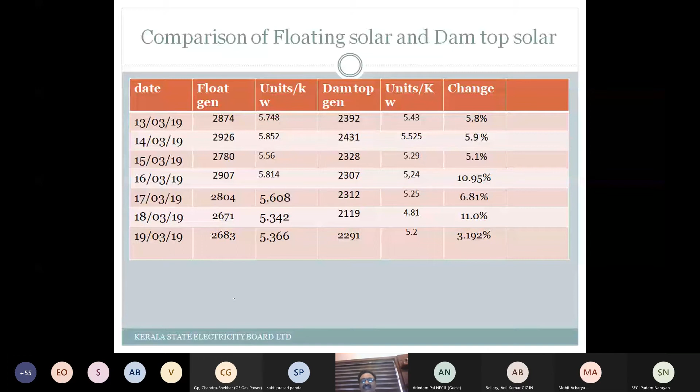That's the average change. I have not found out, maybe around 6 to 7% total change. That's what Mr. Jha also said. He has got 8% change. We have got it in the same place. We have done that study and found out that it is the energy, because it is a similar type of module, polycrystalline modules, same type and similar time, commissioned one or two years apart, and we have found out that this is the advantage we have got.

Comparison of relay and protection, of course, there is no much difference, whether it is land based or floating. Your relay is going to have an effect when you have renewables in the system, because this renewable current is going to come in your fault current, and the coordination time for overcurrent relays will be lost. That calculation is to be done when you integrate to LV systems, you have to calculate this.

Also, we know that the solar plant is not producing any fault-like current. It is only a load current, because it acts just like a current source. There is not much difference between the load current and the fault current, but still there is going to be an effect, and if the coordination time delay becomes lesser and lesser, you will have coordination problems with the relays. That is one of the problems on the LV side.

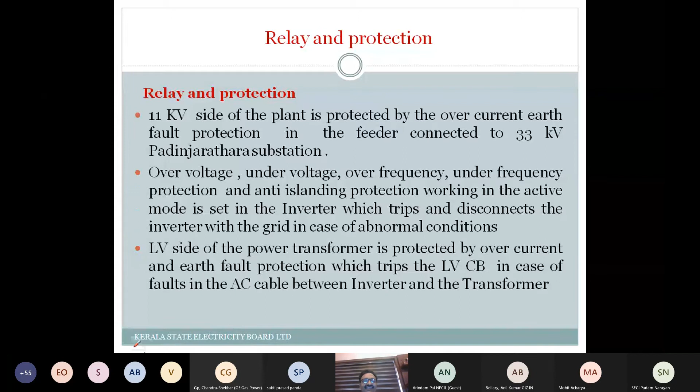Now I'll go to the conclusion quickly. Let me just read out the details so that I don't lose any points.

Details of the floating power plant and its installation on the ferrocement float have been discussed in this report. The solar plant and the 11 kV substation are placed over the ferrocement platform, and the DC to AC conversion is done at the plant itself, resulting in savings in the cost of DC cable. As the power is converted to MV 11 kV alternating current, the power loss is reduced in this typical design. The mooring and anchoring system used in this plant has proven to sustain recent heavy floods in Kerala.

When you have unexpected floods, the condition of the HDPE panels and all that needs to be discussed. But as far as our ferrocement plant is concerned, it was very stable, there were no issues at all. Even though the cost of the ferrocement plant is higher than that of the HDPE panel, the ferrocement plant is made on site itself, which is certainly an advantage in difficult terrain.

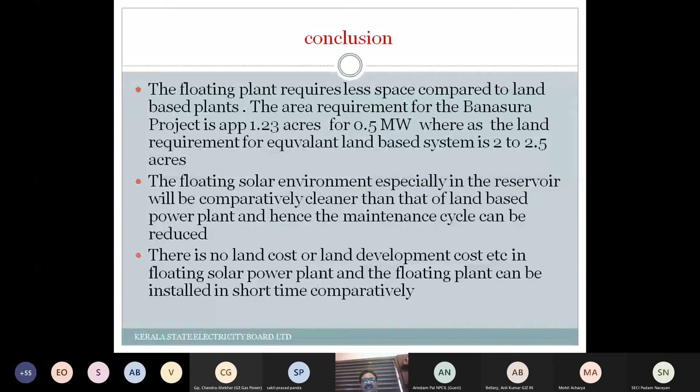There is no land cost or land development cost in a floating solar power plant, and the floating plant can be installed in a shorter time comparatively. The power evacuation cost of the plant has already been discussed, that's a common thing. The shadow in the reservoir is comparatively low in our case, because the depth of the reservoir is not much. If the reservoir depth is more, the shadow will be more. But what we see is we are getting generation from 7 to about 5:30 or 6 o'clock; up to that we are getting generation.

Floating plants, if used in the cooling reservoirs, will have the advantage of less water evaporation. That's been discussed.

Now, future improvements and suggestions based on the experience. Even though the floating solar plant efficiency increases due to reduced panel temperature, there is a large difference noticed between ambient temperature and module temperature, especially during the peak time of the day. An automatic cooling system using water in the reservoir that operates based on temperature information from a sensor can be used to bring down the module temperature.

The efficiency of the plant can be improved. As I had already discussed, when the module temperature is more, for every 1 degree of temperature you get a voltage difference of about 0.4 to 0.5 percentage.

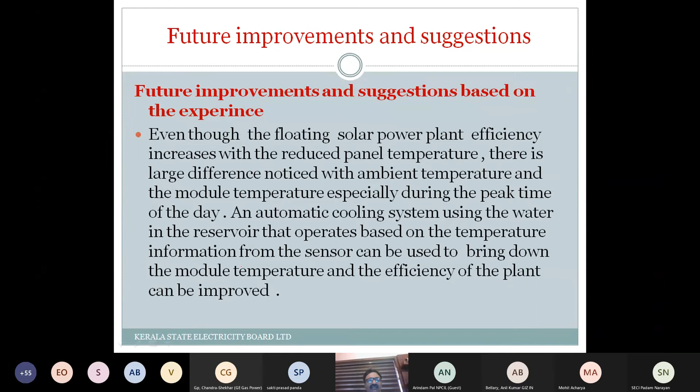The equipotential earthing, achieved by connecting the metal parts of the floating structure to the shore, is very vital for the safety of the operating personnel. Hence, introducing an earthing monitoring system that can be connected to the SCADA, which monitors the condition of the earth, can be used for further improving safety.

Water level variation and flow velocity variations are important factors in mooring system design. Hence, while identifying sites, including dams and reservoirs, these factors have to be analyzed.

The transformer used for the power should have a K factor—that's a normal thing when you do solar plants. Regarding anti-islanding, here there is an issue: we had a delta-star transformer. So when one of the phases on the delta side is open, the star side is still on, and we had some problem identifying the anti-islanding.

That is another issue yet to be solved. Taken as the last point, not the only one, is the project cost. That is what we have seen at that time.

We had estimated the cost. It was coming to around 10 rupees per unit when we calculated, but the actual cost was high. One thing is, there was no competition at all when the project was done. We had only two competitors, and the competitor with HDPE quoted more than that of the ferrocement. That is what happened, and finally it went with this.

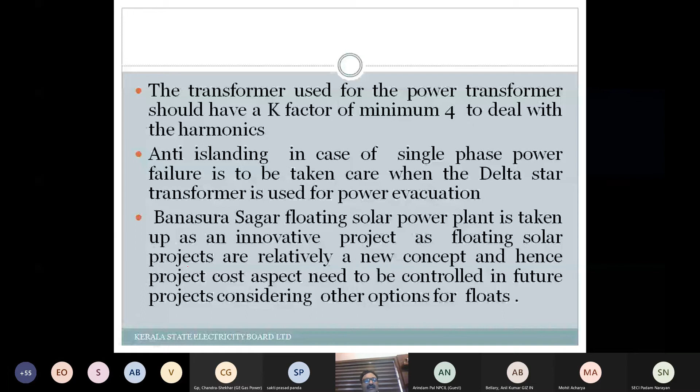Another point to discuss, last but not least, is that the minimum water level requirement is a constraint. Every year during summer you will have unutilized storage of water in the reservoir, because you cannot bring the water down too much, or the float will end up sitting on the bed, making it very difficult or impossible to lift. So we have to keep some water in the reservoir so the float is not in danger of sitting on the bed. This is a disadvantage, because that much storage will be lost, which would otherwise be used for hydroelectric power generation.

That is the last point. If you use high efficiency panels, the space requirement of the plant can be considerably reduced, and cost can be saved. This is my presentation. I think I took a little more time—sorry for that. I've gone through my presentation, and now it is time for you. Thank you.